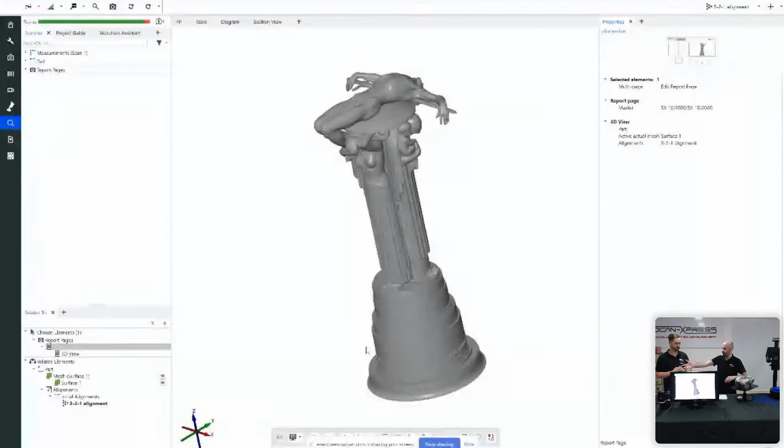But yeah, this is a great example of this handheld scanning system scanning a really large object and using photogrammetry. Yes. So thanks, Ben. So this is a job that we did in Sydney. I flew up with the carry-on T-Scan Hawk, and we measured this sacrifice sculpture. This is actually in the Anzac Memorial in Sydney, and it's about 3 meters tall. So if I come here to the side view, you can see it's just about 3 meters tall.

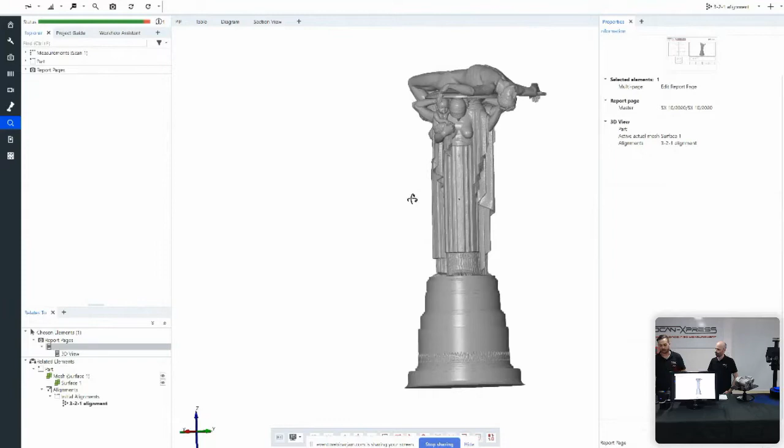So we've got a sculpture here which is meant to be representative of the loss of life during war. Not just the soldier on top, but obviously all the women in his life that supported him and are grieving for his loss as well. But what we've got is, within the GOM suite here, the project where we did all the scanning, and we've got full traceability. If I open up measurements, I've got 2 measurements: photogrammetry and the actual scan data set.

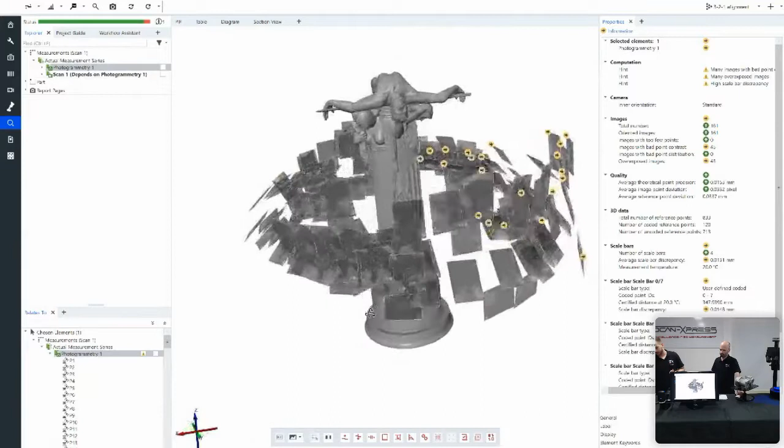Okay, so if I come back to my image mapping, I can see some of the images which I captured beforehand using the photogrammetry system. If I take this photo right here, we can see some of these sparkly points because we've been using retroreflective markers, which we've applied to the surface beforehand. And we've already put them on the part that we're going to be measuring today.

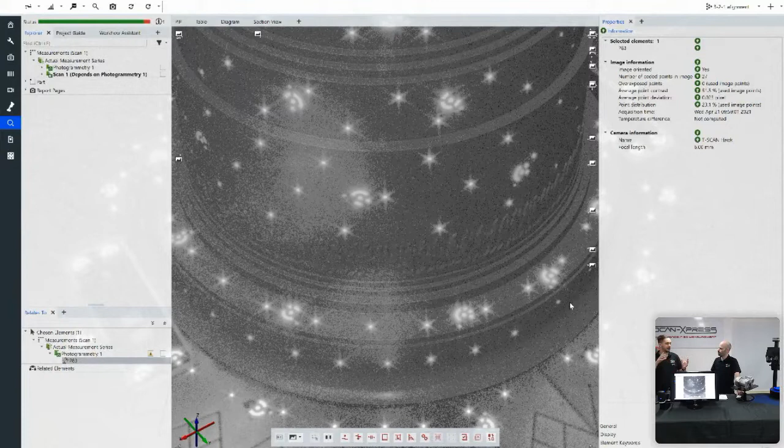We've got them all laid out here, and that's what the scanner uses to identify itself relative to the object. I've also got some coded markers here, and they allow the software to transform all of the photogrammetry images together. So I put all the reference points and coded reference points over my object, and I also keep these scale bars. These scale bars come with the system, and they allow me to verify how well I performed my volumetric photogrammetric study.

Once I've done that, I've got this sea of photogrammetry points. If I turn the scan data up, it's all of these reference points that you can see here, all the way around the object. The photogrammetry captures all of them, and it gives me feedback as to how well I've done. If I come into the photogrammetry module and turn off image mapping, we can see deviations of about 0.01 millimeters and 0.015. So we've done a very good job with this photogrammetry.

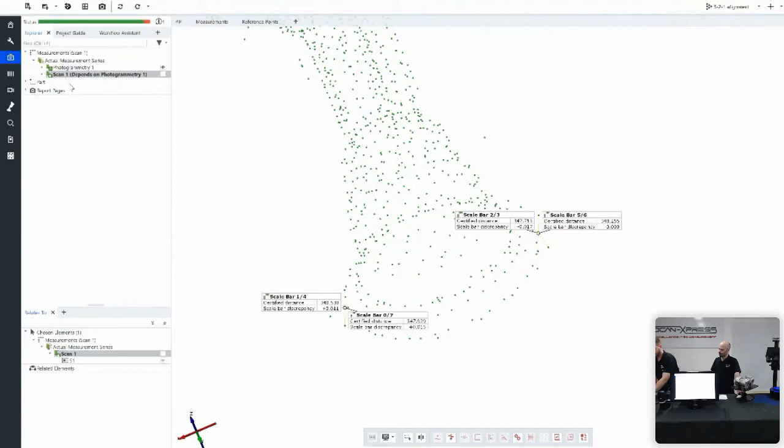Once we've done the photogrammetry, we're able to do the cloud scanning, which is moving along with the scanner, capturing all the surface data. And you can see the end result right there, a really high resolution, dense mesh fully describing the object.

While I've got your attention, I'll just come to our website so you can see some of the photos that we took during the measurement. No, it doesn't want to do that. That's fine, we won't worry about that right now. So that's that little project.

What I will do now is jump into a live project showing how 3D scanning works with the T-Scan Hawk. Sure, but we're not going to do photogrammetry in this one. No, because as I mentioned at the start, it's got about a 500 field of view, so this object falls completely within the field of view at any one time. There's no need to worry about transformation deviations, because it's all captured at the same time.

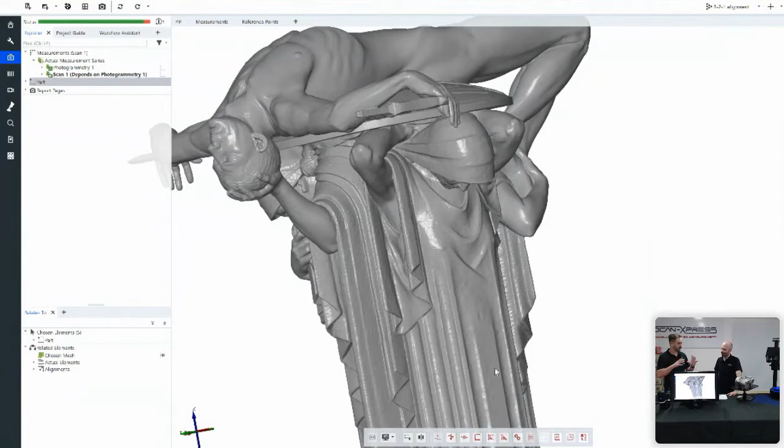Yeah, sure. So I'll open up another project now. So this is a blank project. So the first thing I want to do before I start scanning this is sort of like the photogrammetry, but not necessarily similar, because I don't have the scale bars in it, but I want to capture all of my reference points relative to it first. So Ben's going to click on the capture reference points for me.

I'm going to pick up my scanner, and I'm going to start scanning. And what you're going to see is within the software, you can see sort of a wireframe, and that's sort of the measurement volume that the scanner is looking at any one time, and you can see some measurement dots in there. Those are the reference points that I've already put on there. And as I rotate around, we're going to add new ones in. So it's seeing new reference points and capturing them.

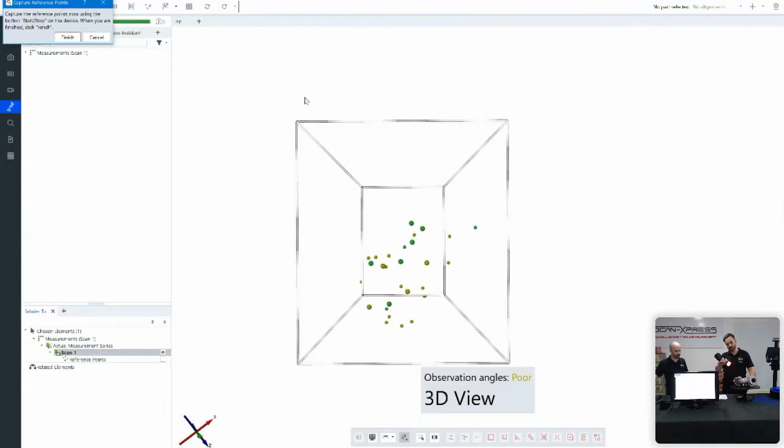And what I want to do is move all the way around until I've captured all of the ones on this side. You'll see some of them turn green, and that's saying that we've captured them at good observation angles. So I'll just go around once more, make sure I've captured all of them on this side. Continue scanning on this side.

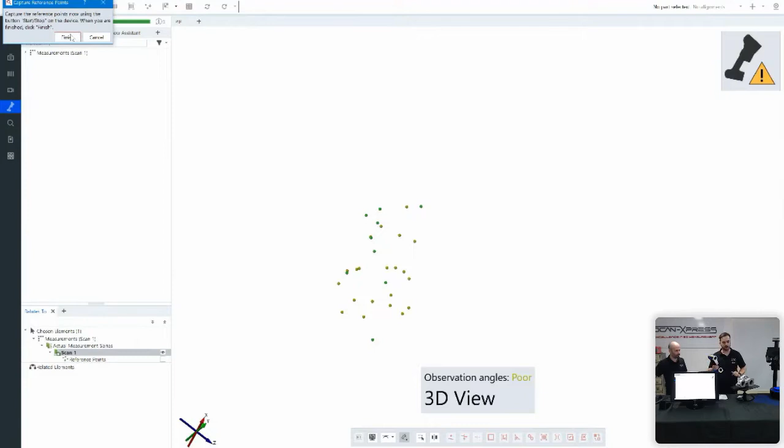So one of the other things I wanted to mention is the fact that I'm just using a manual rotation table here, so it helps me to move the part around without actually interacting with it. So when I start scanning here, you should see that they're red, new reference points that I've taken a measurement of, and they're red because it doesn't know where they are relative to the reference points I've already measured. But when I come down to the side and start continuing further around, you can see, there we go, they've transformed together. So I just keep going around.

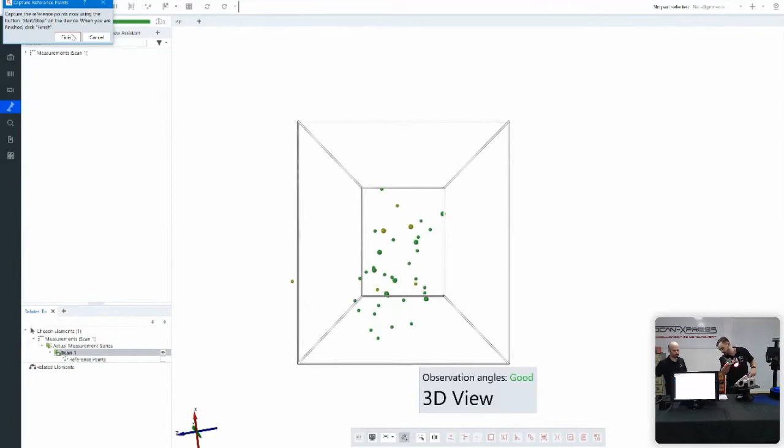One of the other nice features about the scanner is it tells me when I'm too far away or too close. So at the moment you can see in the scanner I've got these nice green lights. Actually, maybe you can't because it's a little small view. Take my word for it, it's got some green lights there, and if I come too close, it starts beeping at me and the lights are telling me to move away. Similarly, if I'm too far away, the lights are telling me I'm too far away and to come closer.

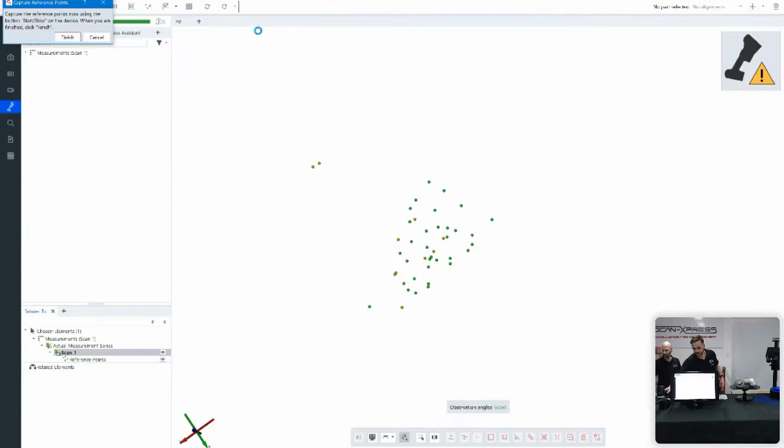But I've gone all the way around now, I've captured all my reference points and I'm happy. So I'll put this down. Ben's going to click finish scanning for me. So I'm ready to start scanning now, but one thing I do want to do before I actually start scanning is tell the system where my rotation table is. Because if I was to start scanning this right now, I'm not going to scan just the part, but I'm also going to scan this table and maybe even the table that the rotation table is sitting on. So that's not something that I want. I only want to capture the data on the part.

So what I do is I grab these. These are just a couple of business cards that have some additional reference points on there. So I put them into the field of view. And the software is going to look for some new reference points now. And when it sees these new reference points, it's going to fit a plane through them. And that plane is going to be my background plane. So any data from that plane down is going to be ignored by the scanning system and not brought into the software. But now that I've got my background plane defined, I've got all my reference points defined, I can start scanning.

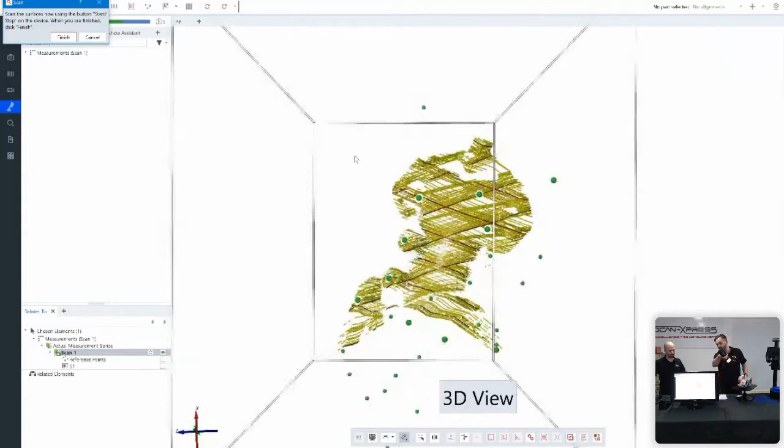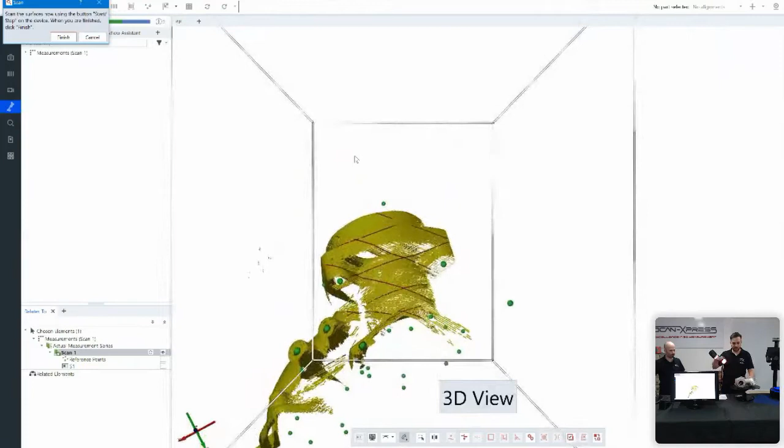Okay, so when I press start now, probably not going to be able to see it in the camera feed, but what you can see on the software is that there's some red laser lines across the part, and they're seven red laser crosses. And the two cameras look at those laser lines to figure out the 3D geometry. And essentially all I have to do now is just rotate around until I've captured all the surface data. You can see it being built up there.

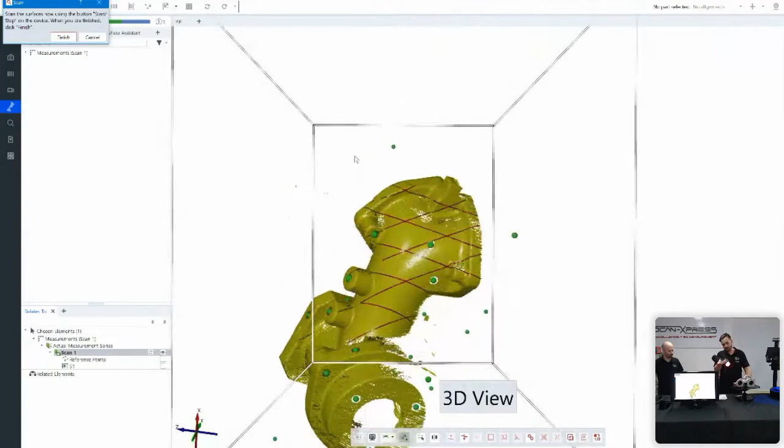So we're scanning at 0.5 millimeters of resolution at the moment. So what that means is that across the surface, every 0.5 millimeters, we're collecting a data point, which is plenty for a part like this. And just keep going. You can obviously see in the software where we've missed data, where we need to capture a little bit more data.

But we're looking pretty good. So I think we're probably just about ready to say that we're happy with the data we've captured on this side. Yeah, looks good to me, man. Yeah, looks great. Okay, so I'm saying that I'm finished on that side, and what I want to do now is flip over and scan the other side. So I'm literally going to flip the part over.

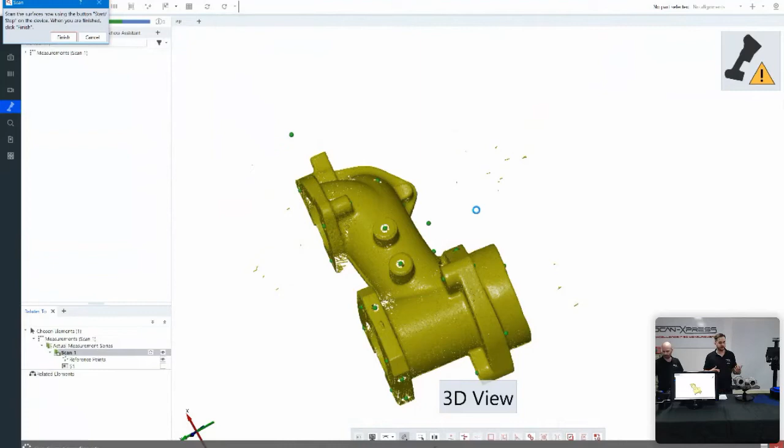Okay. And what we need to do now is we need to redefine where that background plane is, because when I was scanning before, I said the background plane was there and it would be deleting anything that way. So I need to redefine where it is using the same cards. We just need to wait for the software to be ready. Lovely. Thank you, Ben. All right, all good.

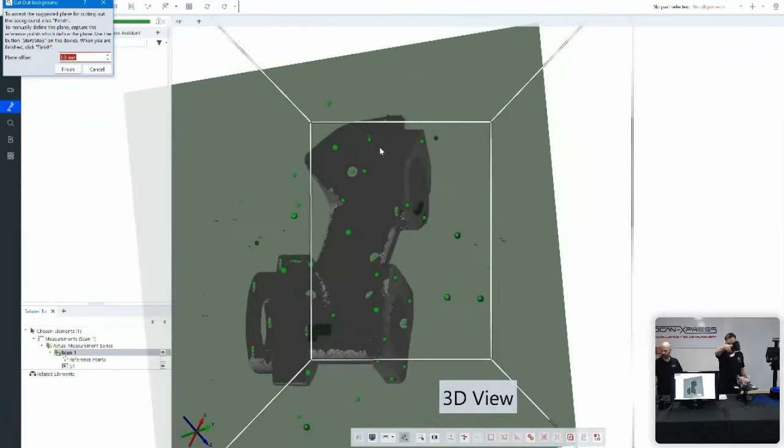So again, it's going to look for some new reference points. 1, 2. Oh, do that again. Yep. Is it happy? It's got it. Yep, it's got it. Great. All right, so I can remove these again from the measurement volume. And now, because I have pre-measured the reference points from both the top side and the bottom side, when I start taking this same data set, it's going to stitch it into the previous data set that I've collected. So you can see here when it starts.

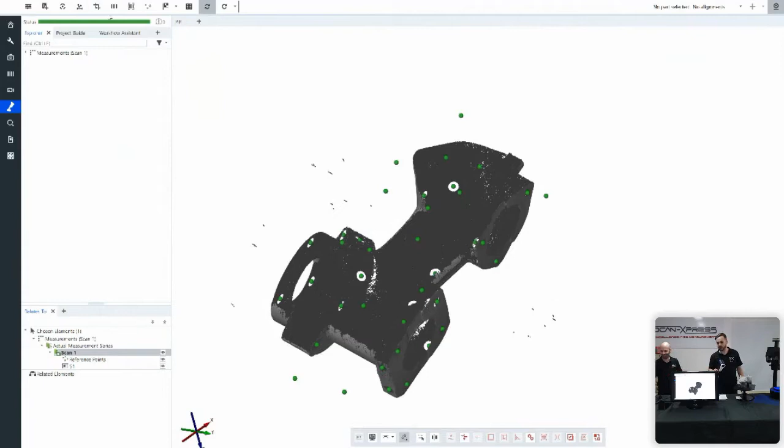You want me to? Please click scan. I'll press the button for you, mate. Don't worry. Thank you. We can do it without me.

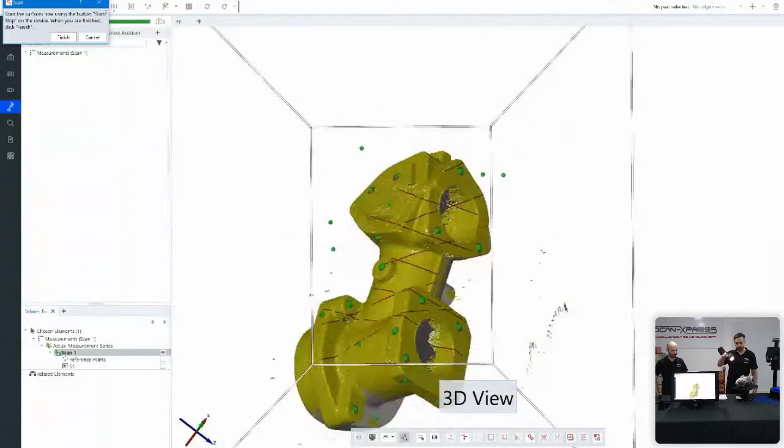Yeah, exactly. So there we go. So now we can see the data being collected in that same coordinate system as what we previously collected. And again, same as last time, we're just going to keep going until we've captured all the data. Pretty easy. Let's go around a little bit more. Okay, do need to go around one more quick time, but I think it's looking pretty good. Yeah, I think it looks pretty good down there. Excellent. Okay. So I click the power button in the back. I can put this down.

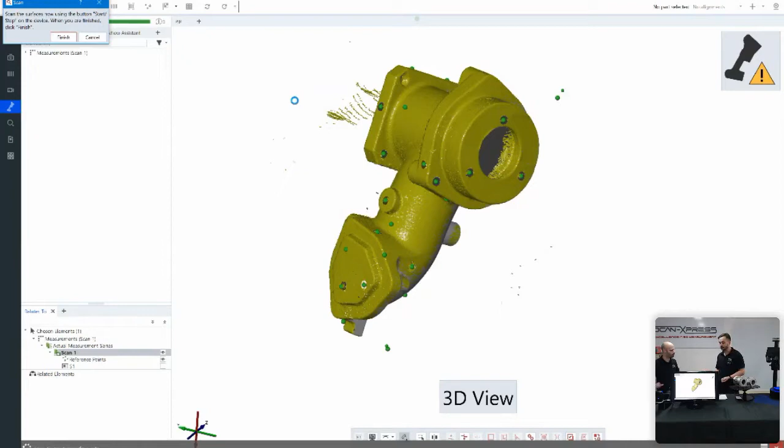So as we sort of mentioned at the start, the reason we were scanning this is to showcase it as a reverse engineering example. So what we've done is we've collected a dense point cloud, thousands and thousands of points over the surface. We've done it from both sides. So we've finished the scanning process, but the next step is what we call polygonize it, which is tell the software to process the thousands and thousands of points into a single mesh surface file. And then once we've got that, we can do whatever we want with it, whether it's inspection or reverse engineering. In this situation, it is reverse engineering. So let's throw it to Ben now, and he's going to show us some reverse engineering of it.

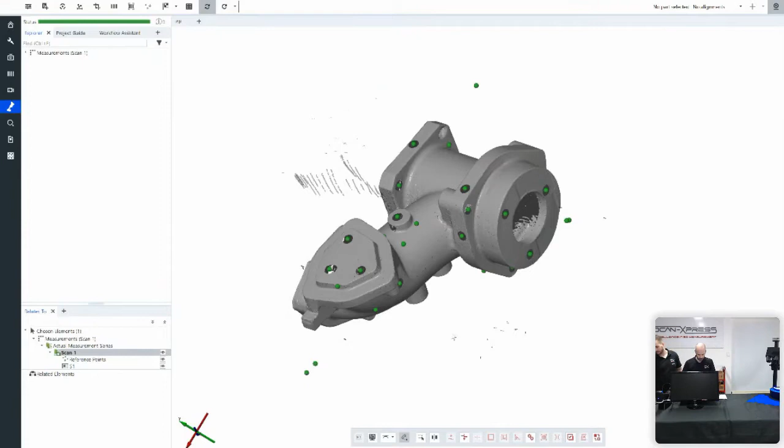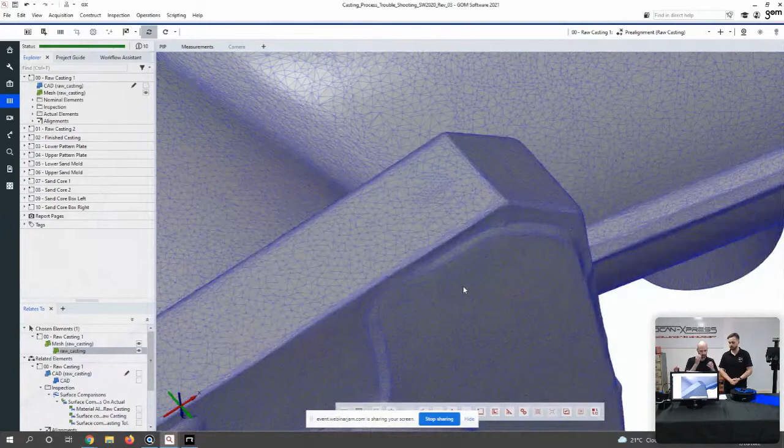So what we can do then is, as Josh said, we can go ahead and start looking at that reverse engineering process. So we can export the data from the GOM software straight into the ZEISS reverse engineering ZRE package. So all I do is just right click on the mesh there, top option here, export to ZRE. We can also export to DesignX, which is a third-party software, but we're looking at ZRE today, so we can do that. And then that's going to open in here, which is our ZEISS reverse engineering package. So this is where we can start building up our math model around our scan data.

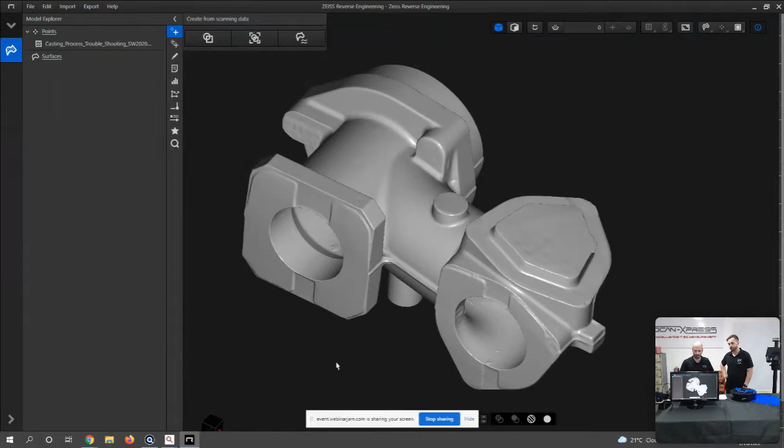Because what we're going to do is, let's say we want to remanufacture this part. We don't want to do that straight from the scan data, because what that's going to do is just carry out any errors from that scan into the actual part. You know, if we look at this plane right at the top here, you can see that it's not planar, really.

There's lots of pitting, there's lots of holes in it. It's not that true geometry that we want to then start remanufacturing from. So what we can do is actually start creating those math surfaces from this data. So in the ZEISS reverse engineering package, we can best fit these features straight to our scan data.

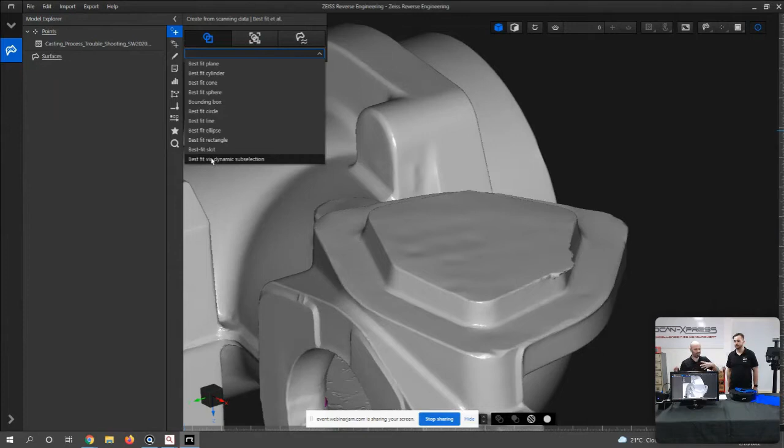I can do it by dynamic subselection, which can do quite a lot of the hard work for me. All I need to do is just click on the surface I want and select what kind of feature. So in this case, it's a plane here. What I can do is just increase and decrease the selection. So what I'm looking at is that orange selection. Make sure it's a nice even coverage across that whole feature that I want.

Now what we can do is actually calculate those current parameters. So what it's doing is fitting that geometry to the selected points and telling me what this reference axis is. Now I can accept that, but let's say we want to reverse engineer to design intent, as in how this part was supposed to be manufactured. What we can do is come in here and actually edit these features.

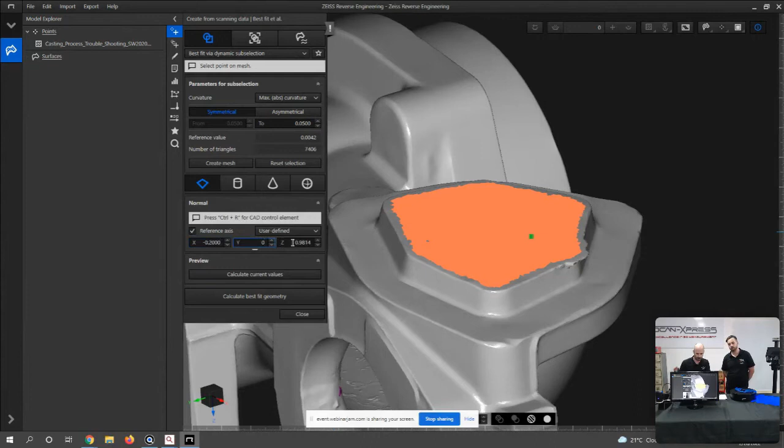So what this is meant to be is maybe -0.2, the Y is probably 0, and the Z is probably 1. And what we can do is then best fit our geometry, and it's going to calculate that plane to the reference geometry. So you can see a nice plane there. That's exactly where we want it to be. So we can create that one, which is done.

And now what we want to do is maybe select this one right here. So this is a cylinder, so let me select the cylinder. I'm going to again select that surface. We can see that orange sub-selection right there. We can adjust that by increasing it. So what I want is a nice even selection all around that cylinder, using as much of this good quality data as possible. Again, we can calculate its current values and have a look down here.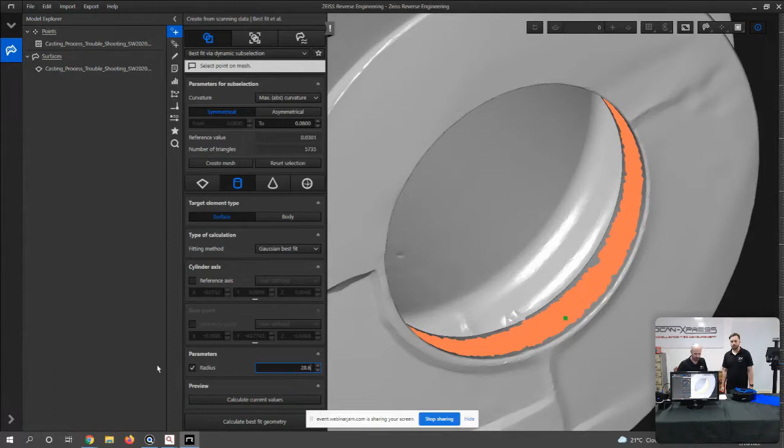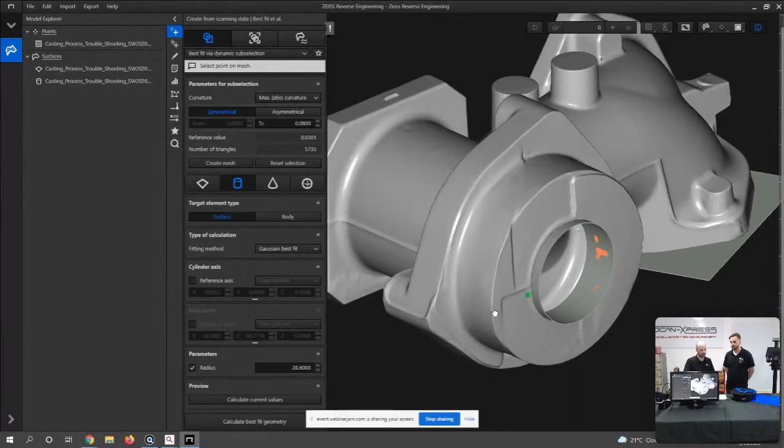That radius, 28.6, and then we can calculate that best fit geometry. And that's going to fit that cylinder exactly where we want it to be, right in that feature. Now, all this is going to be is just fitting all of my surface features to this geometry, building up the model, and then eventually combining them all together to create our solid, cutting them all through. It takes a bit of time, but that's the general process, selecting them and then editing these features.

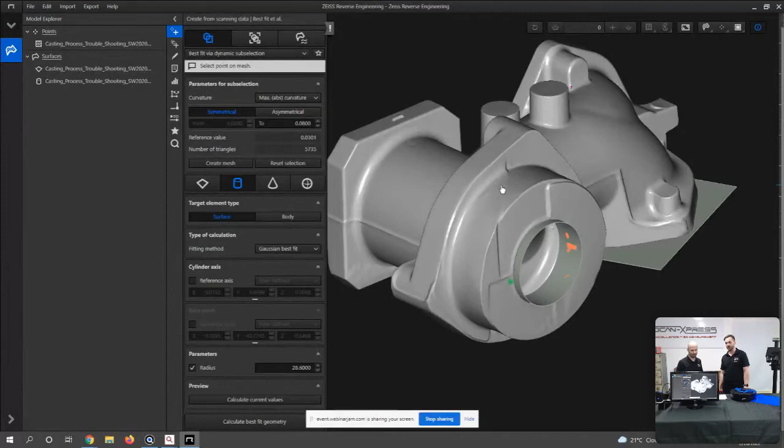But ZRE is a pretty fantastic product. This is only showing a tiny amount of what's really possible with it. One of these great features is called Tool Correct. Talk to me about Tool Correct, Josh. Tool Correct is a cool feature within ZEISS reverse engineering. It does literally what its name is: it corrects tools. So we've got a nice video which we can play here.

But what it is, is a way for us to measure a component that comes out of a tool, whether it's a casting tool or a plastic injection molding tool, and then get information about how that part deviates from the ideal part. But rather than telling somebody else what the problem is, it's actually going to correct our tool. So it's going to modify the CAD model of the tool so that the part that comes out of that tool is closer to the design intent.

Yeah, exactly. So it's just reducing those design iterations that you might go through, where you change it, test it, measure it, change it again, test it. Yeah. What we can do is reduce those steps down. So we just take the part, and it's going to actually adapt the CAD model to the captured scan data of that part. Let's show you this video. It's a really cool feature. So we'll play this right now.

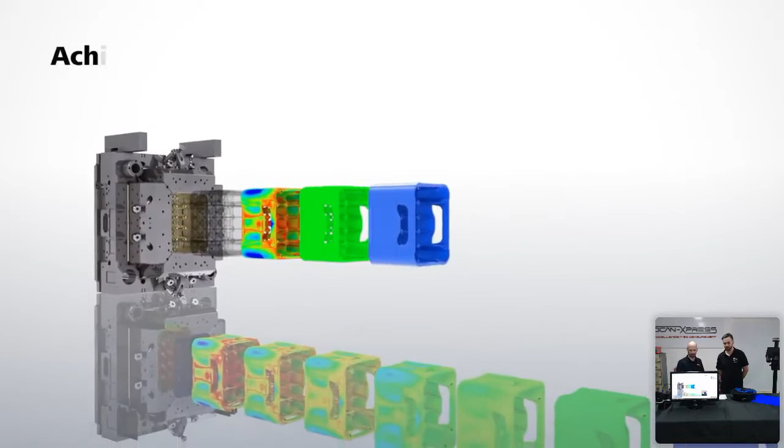Yeah, excellent. Really nice video showing that feature. So yeah, we just had a couple of questions while that video was playing. Maybe we'll answer these straight away. So, Josh, the software that we're using. Sure. So Frank's asked what software we're using. So the two software that we have shown the scanning in is called GOM Suite, GOM Inspect specifically, and then ZEISS Reverse Engineering, where we've done the reverse engineering.

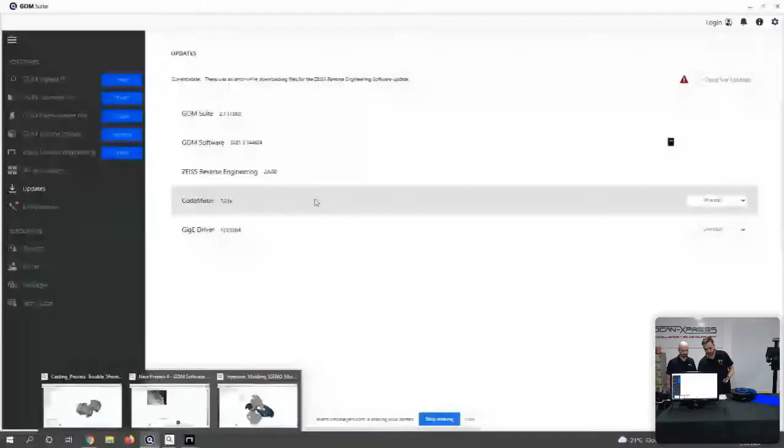But maybe one thing that I can just show really quickly before we proceed, just to make it crystal clear, if I turn screen share on here, what we can see here is the GOM Suite. So whenever you want to access any of the GOM softwares, you open up this GOM Suite, which is this black and blue icon here, and this gives us access to all of the GOM softwares. So we've got GOM Inspect, and that's where we've done the scanning so far today. It's also where we're going to continue doing some scanning and some inspection. And then all the way down the bottom is the new ZEISS Reverse Engineering software. So that's where Ben showed the reverse engineering of the casted part and that scan data that we had.

Okay, another question? Yes, another question from Amanda. Would this work on a small injection molded part, the size of a pen lid? So absolutely, those features within the ZEISS Reverse Engineering software would work on parts of that size. What you might want to consider though is the scanning system that you use. This laser scanning system that we've just shown is great for medium to large components, but it probably won't get quite the resolution for a part the size of a pen lid. So that is where we might want to use something like the ATOS Q, which leads us quite nicely into this, because we'll show you high resolution scanning that works on small components like that.

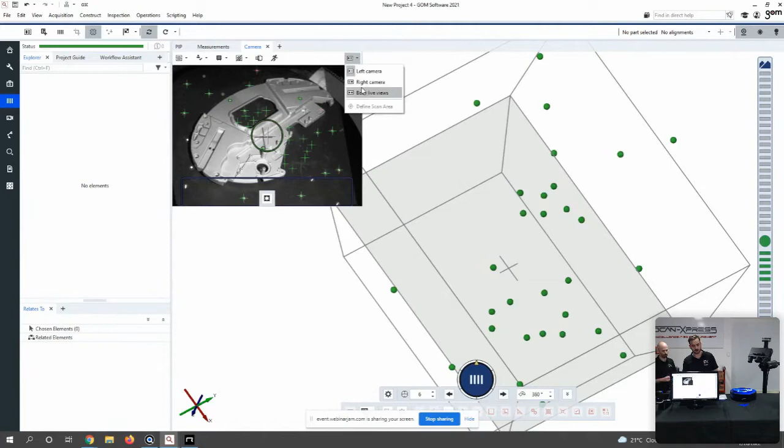Yeah, great. So let's get started. What we're going to do is dive back into that GOM Inspect software, and this time it's going to be configured to start scanning with our ATOS Q right here. Start sharing that, and then Joshy can carry on. Great. So same as we did with the ZEISS T-Scan Hawk, with the ATOS Q we still scan into the same software, GOM Inspect. And what we can see here in this top left corner is a camera feed, so I can switch this from just the left camera to both live views, so you can see what the left camera and the right camera of the system are seeing, and we've got our part in the middle of the software there.

So one of the really nice things they've introduced in the 2021 version of the software is this workflow assistant. The workflow assistant is really great for somebody that may not be too experienced with the software or may not have been formally trained with it. With the workflow assistant, they can follow these prompts and get some really good scan data without too much effort. So the first option asks whether we want to scan a single part or multiple parts simultaneously. There is an option for multi-part scanning where we can divide the measurement volume of whatever measuring system we're dealing with into pieces of a pie, into segments. But today we're just dealing with one part, so I'm going to say scan a single part.

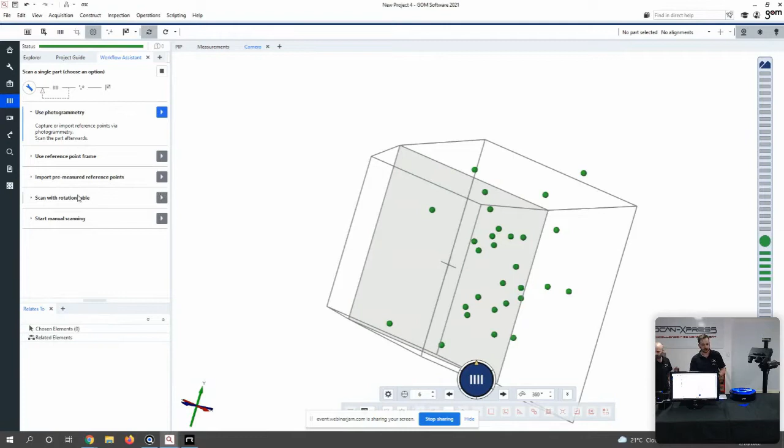Then the software asks me some questions about the reference points. Are we using photogrammetry, if I've done a photogrammetric study for a particularly large part, for example, or a reference point frame, or do we want to import some pre-measured reference points, or scan with the rotation table? And we want to scan with the rotation table today. What we've got here is a GOM ROT 350, which is an automatic rotation table, and is recommended to come with the system because it saves a lot of time. So I'm going to scan with the rotation table. I'm going to bring up my camera again, switch back to just the left camera, and say start scanning with the rotation table. It's going to ask me for the temperature.

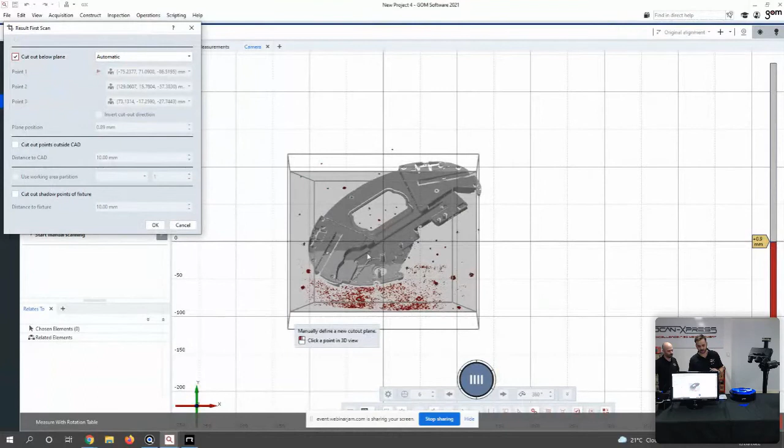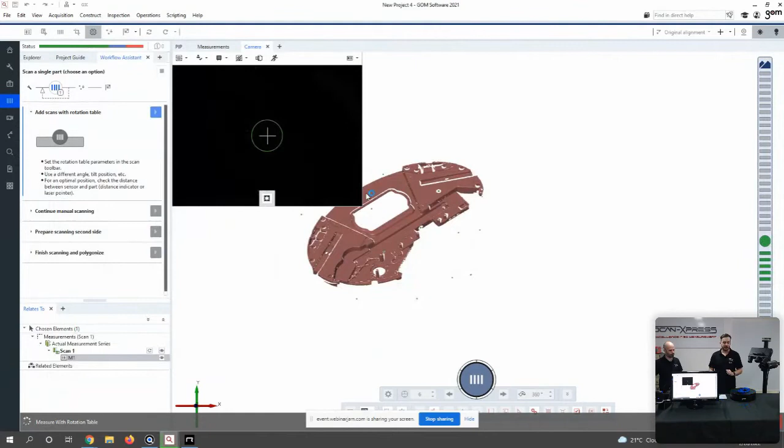And what you'll see in a moment is the left and the right camera project a series of lines horizontally and vertically across the part. We've taken that first measurement there now, and what it's asking for me is to define our cutout plane. So similar to how we did it with the T-Scan Hawk, where we manually defined it, this time it's automatically defined it for us. So it's just scanned the bottom of the table there and figured out where the background plane is, and it's asking us if we want to cut that out, and we say, yes, please, we want to cut that out.

So now we continue, the rotation table rotates. Again, the projector projects its lines across the part. The two cameras look at those lines to build up very high resolution detail mesh, and you can see the speed at which it's doing. What kind of resolution are we working to with this system, Josh? At the moment, with the ATOS Q 12 megapixel system over a 270 volume, it's 44 microns. 44 microns, that's about 10 times the resolution to the laser system. That's right, yeah. So it's very, very high resolution, very, very accurate data.

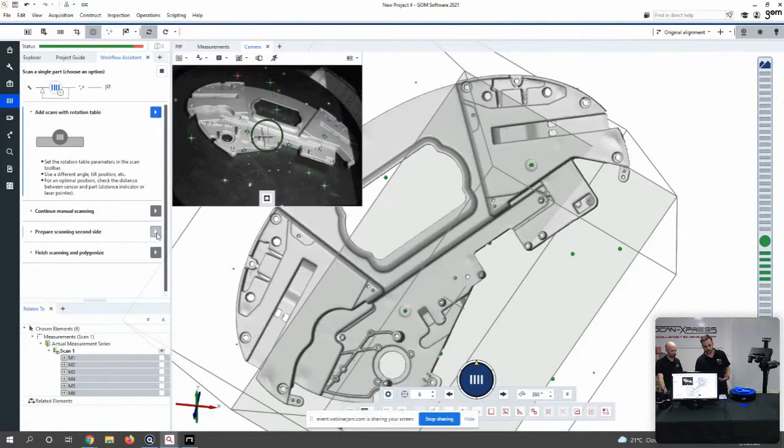So we can see, if we come across here, we can have a look at some of that very high resolution data. Now, actually, what we're looking at here is just a preliminary version, just a way we can get an idea of if we've captured all of our data or not, and we're happy with this. So what we need to do now is flip the part over and continue scanning on the other side. So I'm going to say prepare scanning second side here in the workflow assistant. It's ready for me. Now I flip the part over on the rotation table. And again, I can say scan with the rotation table.

Okay, so similar to last time, the system projects the pattern across the part. It's going to automatically detect and cut out the plane for me, which is right there, and I say, yes, please, get rid of that. And again, we continue rotating and scanning and rotating and scanning. So yeah, this is a complex plastic injection molded part. So because of features, it's a bit more well suited to a higher resolution, more accurate system like the ATOS Q rather than the T-Scan Hawk.

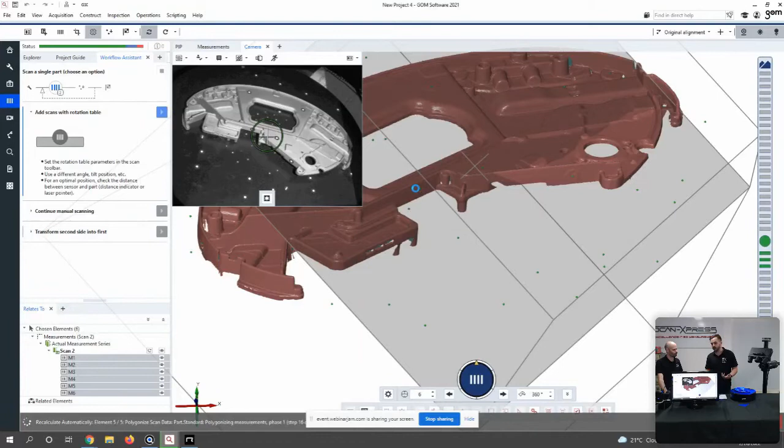The other benefit of having a more accurate, more repeatable measuring system is the fact that we've got greater confidence in the measurement data, and that means we're able to make good decisions when we're doing our inspection. Yeah, exactly. That's why this might be used for an inspection type project, whereas this system right here might be used for reverse engineering. Yeah, great. So what we've done so far with the ATOS Q is we've scanned one side, the rotation table went around, we captured that data, we flipped it over and measured all the way around again. What we've got to do now is put those two halves together.

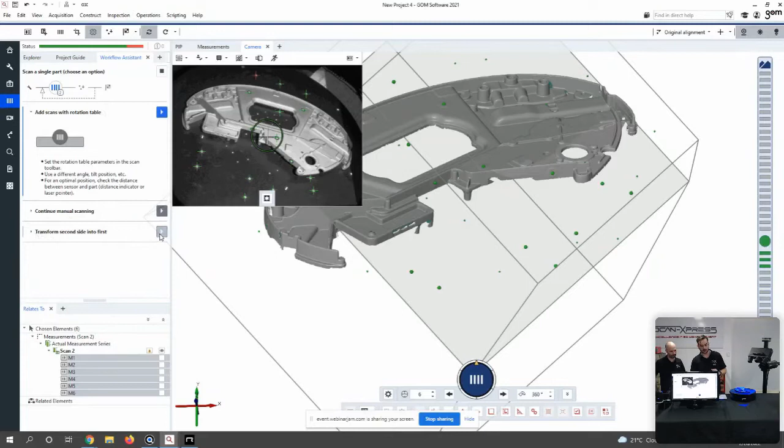So we can say, again, within the workflow assistant, transform second side into first side, and the software is actually going to do this for me automatically. So we can see here we've got one side over there in burgundy and the other side over here in grey. And we've got some quality feedback as to how well we've actually done that transformation between the two halves. And the software is telling me it's a high quality transformation. So we're happy with that. Congratulations. Thank you very much.

So once we've got this data, similar to how we did it with the Hawk, we've collected our dense point cloud. We want to now polygonize it into a single mesh file, and then we can start doing our inspection workflow with it. So Ben, you're going to jump in to another project where we've already completed the scanning. Yeah, exactly. So all that's going to be doing is just taking over from exactly that step where we've just polygonized all of this data. So what you can see here is the output from this GOM file, which is this high resolution point cloud of data.

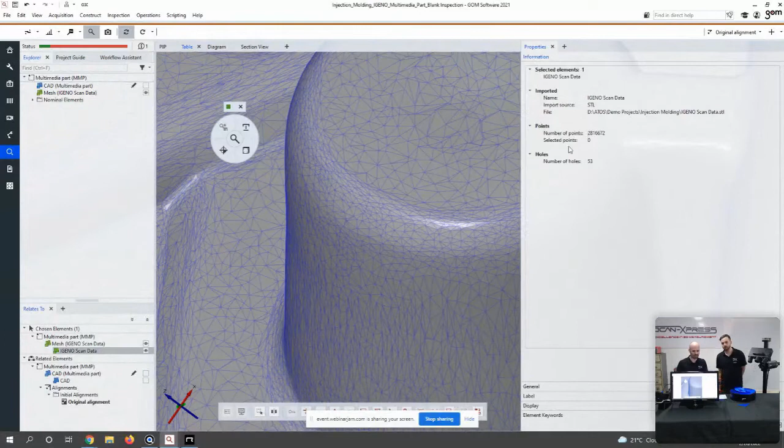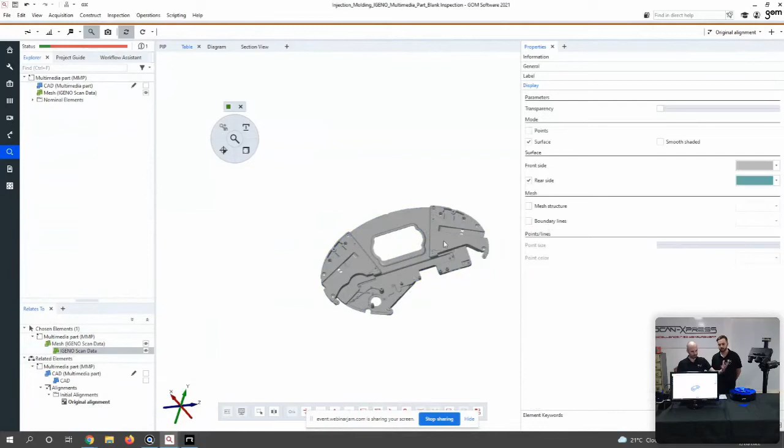Now you can see here up in the information, we've got just under 3 million data points captured on this injection molded part. So it's very high resolution, really good quality data. This is the standard output of data from this ATOS Q, and it's a fantastic measuring tool for getting this really good quality, high resolution scan data. But now what we want to do is actually inspect it. Yeah, we've got our part, we've scanned it, we've got our manufacturer drawing, we want to see what kind of results we get.

So what we need to do is start doing some alignments. So what we can do is do a pre-alignment to start with. Now what this is going to do is just a global best fit, just slam these two parts together so we can start our inspection process. It is just a best fit, but we can use this to actually start doing some of our inspection.

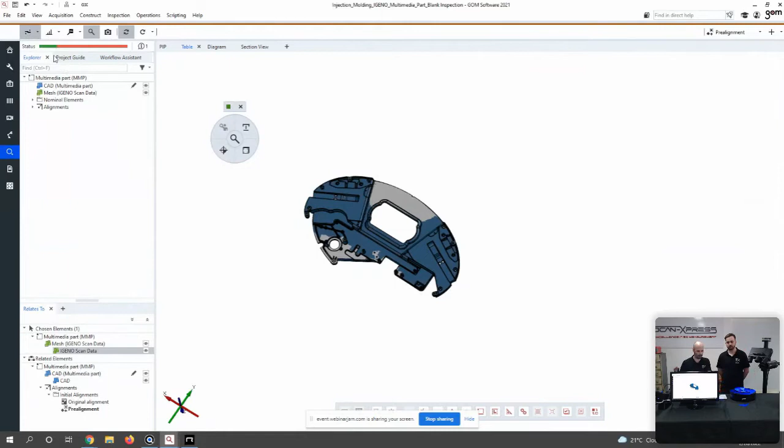So what we've got along the top bar now is some of our quick access shortcuts, so I can do my surface comparison. It's usually a good way to start the inspection, and what it's going to show is the closest point on the scan data to the closest point on the CAD model, and show that up as a color map, so we can get some initial inspection on how good our part is.

There's input tolerance, maybe 0.2 mil, and then maybe just change our color map right here to, let's say, 0.5 mil. And then we can start having a look and seeing where our part sits. So any data that's blue means that scan data is below the CAD model, and anything that's yellow or red means the scan data is above the CAD model. We can see that overlay here if I just bring up the CAD model and how that relates to our scan data, which is that color map.

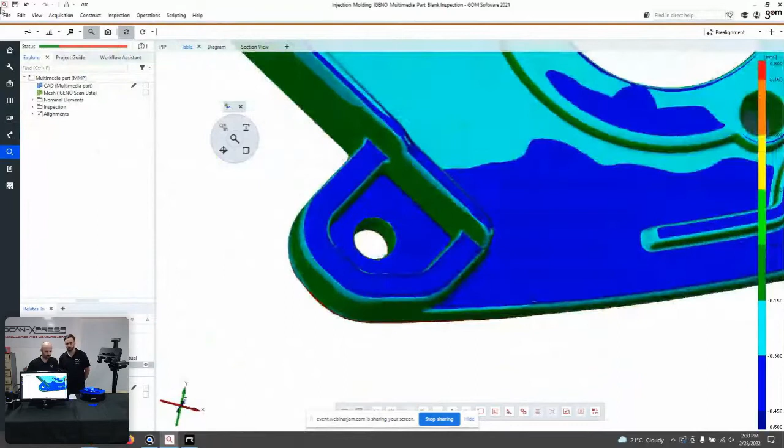Now what we can do is apply some deviation labels right here, and by just holding down my control key, I can create some of these deviation points straight on that color map to know exactly what the deviation is in any of those localized areas.

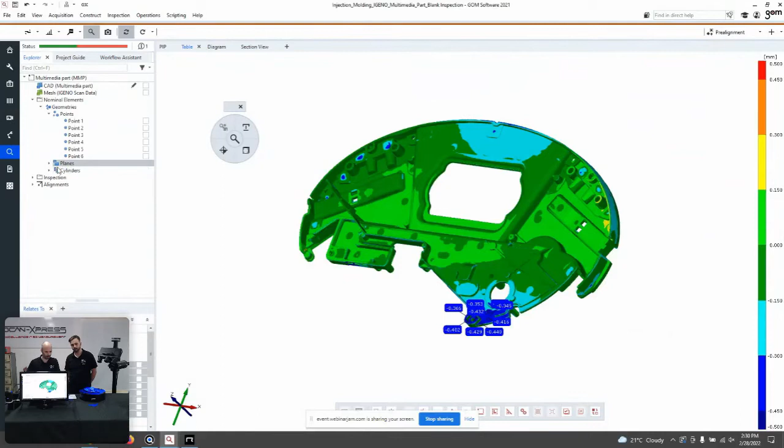Now, what we can then do is, we want to inspect back to a manufacturer drawing, right? So we can't just rely on a best fit. We need to rely on an actual solid alignment. So I've already created a few features right here on my CAD model, which is some planes and some cylinders, which relate to these datum points. So let me just apply my fitting element. Essentially what I'm doing is saying fit all of these elements to the scan data in the best way you possibly can, which is done.

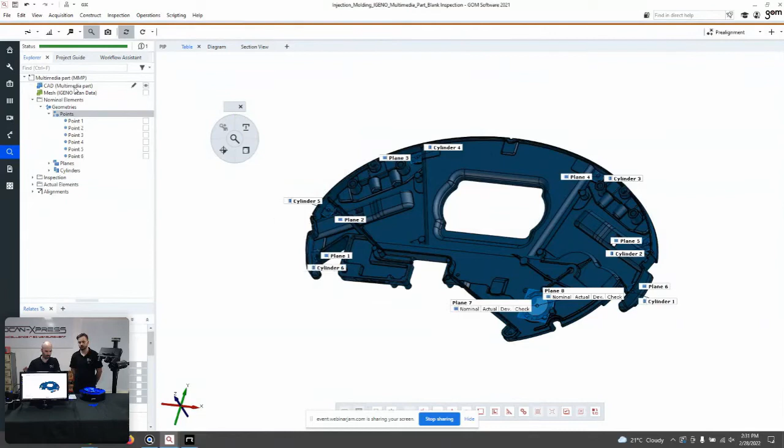And then I've got my reference point right here, which is my reference construction. And then what we end up with is these 6 points, which are my datum points defined by my drawing. So what I can do is do an RPS alignment, select those 6 datum points, and that's going to align to those points. Now that's a fixed alignment rather than that best fit.

Now what that does is it's going to add in a new alignment to my tree, which is just on the left-hand side. So you can see here, I've got my initial alignment, which is that best fit, and underneath that, I've now got my RPS alignment. We can have as many of these alignments as we like, so we can do multiple alignments to every part. So what that means is maybe on a casted part, we can inspect our casted datums, as well as doing a best fit or a localized best fit on the surface, and really get a good understanding of what's happening with our part.

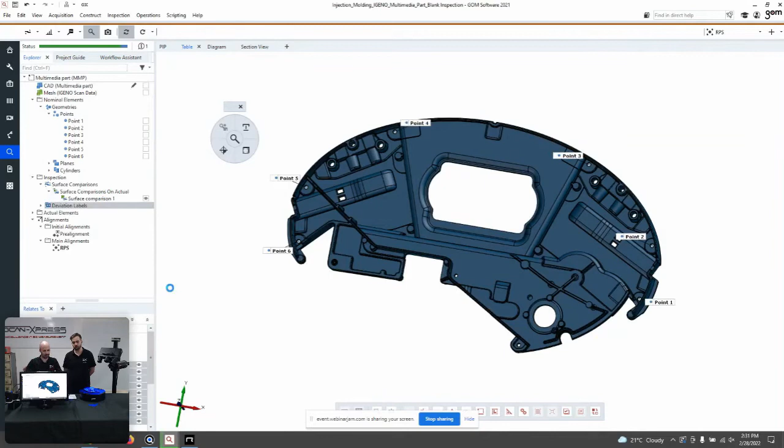Now this is going to update all of my inspection live. So if I just bring up my surface comparison, it's just going to update to that new alignment. And what we'll be able to do is switch between these alignments and see how that alignment is going to change that color map. So see what's happening there. That's how we can get a really good understanding of exactly what's going on with our part.

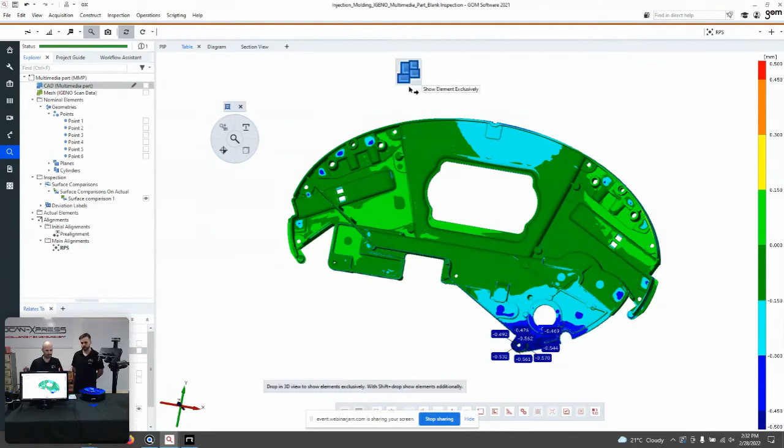So once we've done this and we've got our color maps and we've kind of got a good understanding of what's going on, then we can start doing some actual feature-based inspection. So this is where we can create some features and do some inspection as you might see on a drawing. So let's just take some features here. So we've got this conical shape right here. I'm just going to create a fitting cone to that by just, again, control clicking on the surface. Fitting element to snap that to my actual scan data, and then we can do our inspection.

So we've got this little circular widget right here. This is called the iInspect, and it controls all of my dimensional checks and all of my GD&T. Everything's controlled here, and it actually updates depending on what got selected. So I've got a cone selected here. It's going to give me everything that's relevant for a cone. So in the checks, it's just an angle because I can't do any diameter or radius inspection on the cone.

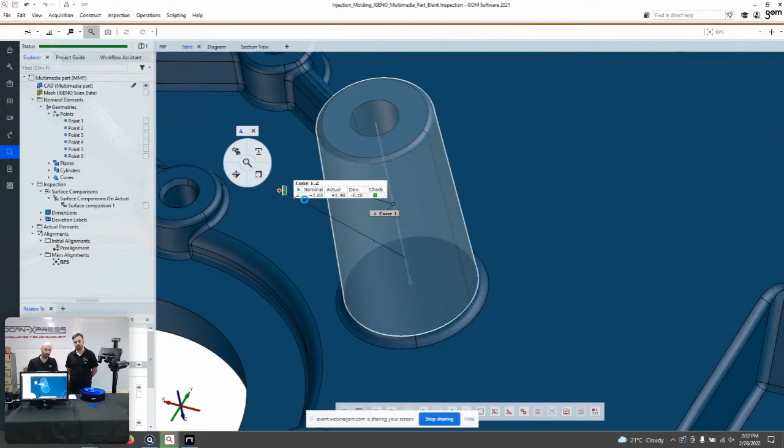What we can do is apply a tolerance, and that's going to give me my pass-fail check, and I can go into my tabulated report and create all of my intuitive go, no-go reports from there. We can also do all of our GD&T. So let's just say we want to do a flatness check.

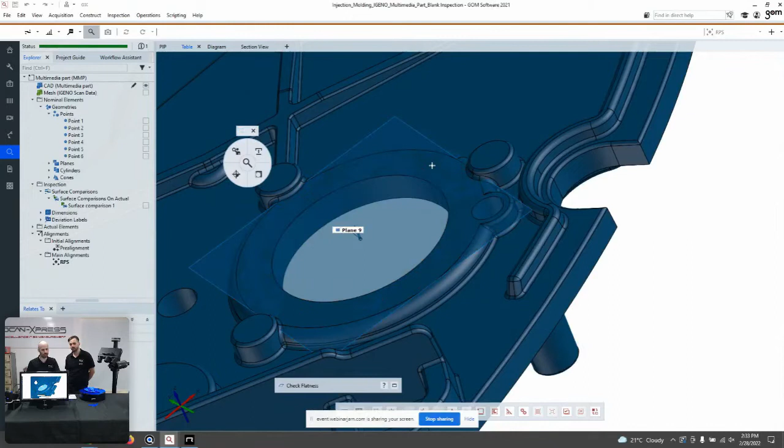What we can do is come over to our CAD model right here, select the flatness check, and then click on the surface. And that's going to do everything for me. It's going to create on the nominal, create on the actual. All I need to do is input a tolerance. So that's all done, and we've got our GD&T flatness check.

But the great thing about GOM Inspect is you don't have to stop the inspection here. Just because we've got a green tick, we've got a pass, doesn't mean that the inspection needs to stop. We can go into much more detail. On this plane, we've got probably 10,000 individual points, and we can inspect every single one of them.

So what we can do is show the color deviation representation, bring back up our scan data, and then maybe reduce our tolerance legend down just slightly. So let's go for 0.1 of a mil. And then what we can see here is actually that surface comparison again, but this time it's just related to this flatness check. So what we can see here is, it's a plastic injection molded part.

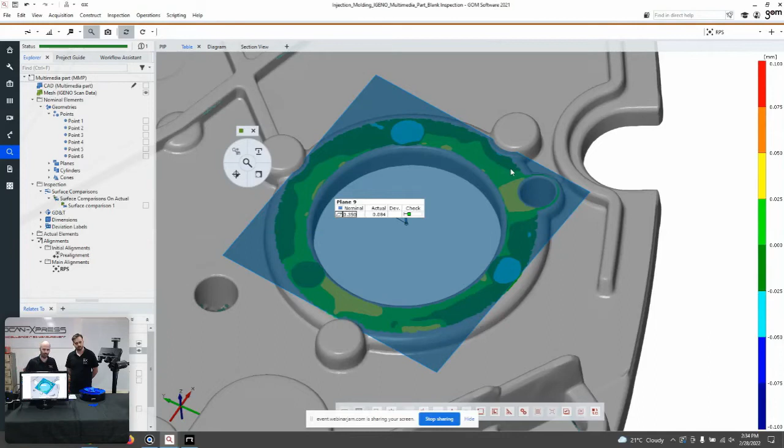These are the ejector pins, and we can see the 3 ejector pins right there and how they've impacted that surface. Now, just because it's passed our flatness check doesn't mean that it's not still having an effect on that surface. Now, by using these tools and maybe going into some more detailed analysis using some SPC or tracking some data over time, we can see if this tool is wearing and if it's going to fail at some point, and have that predicted failure built into the software, so we can do this ongoing analysis of our parts.

So the level of detail that we can go to with the inspection reports is huge. So we can have these go, no go, pass, the parts passed, it's fine, it goes on down the line, but then we can have these additional reports going on in the background where we get all this extra additional information. Pretty good, right? It's amazing.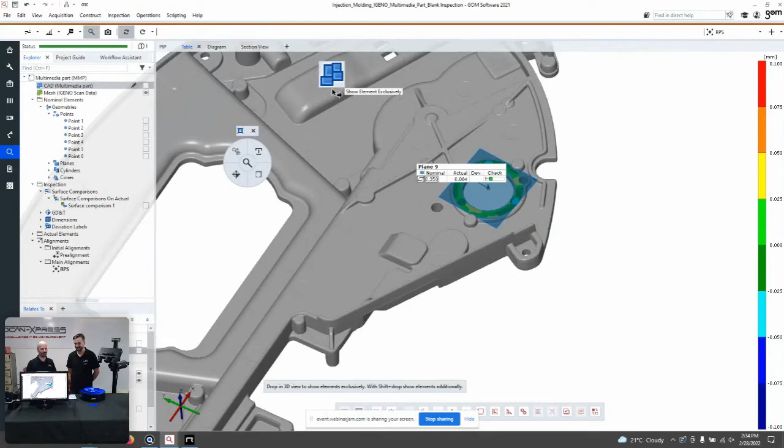So another feature that I want to talk about, and this is where I get probably excited. I've been excited before. So this is a new feature that's coming out to GOM specifically for plastic injection molded parts. And this is called dewarp. So what this is, when you get plastic injection molded parts, as they come out of the tool, there's going to be inherently some warp, some twisting, and that might be related to the cooling, it might be related to how the material has been injected into the tool, and that's going to have an effect.

Now, what we usually do to inspect those is we physically clamp them. So we'll have a fixture that physically clamps them into their assembled position, and then we can inspect them in their assembled position. The problem with that is that they are expensive to manufacture, they take time to manufacture, and if we're working on a development part, maybe we don't want to invest in having those fixtures just for inspection.

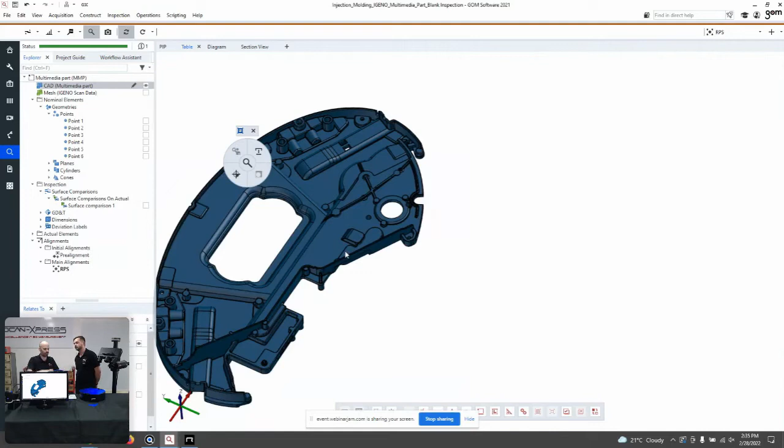What we can do within the software is this thing called dewarp. And what that's going to do is adjust our scan data to allow for that warpage. So we can actually constrain the live scan data within the software. I've got a short video. I'll show you how it works, and we can talk a bit more about those features, and I can get even more excited. So let me show you this video. I'll dive back into right here, video right here, and dewarp.

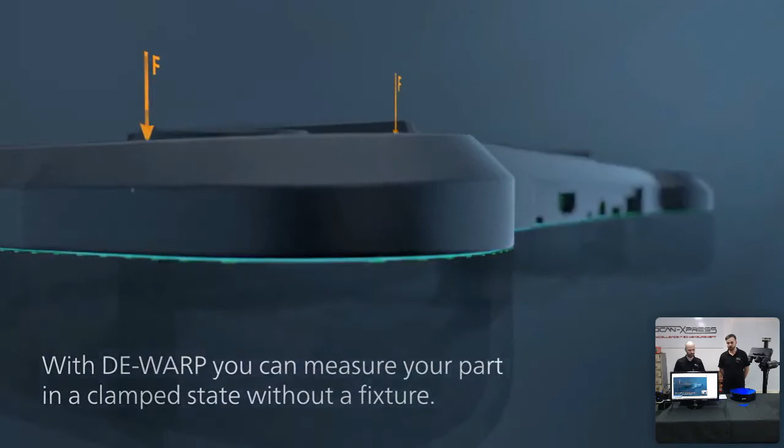Yeah, wonderful. So that's dewarp, showing dewarp in action. Brand new feature coming this year to GOM Inspect. So GOM actually developed these kind of tools and this kind of feature for sheet metal parts. It's called adaptive fixturing. It's called not adaptive fixturing.

It's called virtual clamping. Yeah, to automatically clamp those sheet metal parts back to this kind of virtual fixturing to simulate that effect. That was quite an in-depth process. It involved getting a different package and a different license involved in the software. The plastic injection molding part is actually available within GOM Inspect.

So it's a much simpler process, and we can do it on pretty much every injection molded part. What we do is we input some critical dimensions, such as the material properties, the CT, and things like that. And then it's going to do this calculation of adjusting that and actually applying those over-constrained forces to our captured scan data.

Really exciting feature, and I'm really excited to give it a go, and then have a chat with some of our customers who are already using these systems, and how these features can just be bolted on and really improve their manufacturing process and save time and eliminate the need for creating those really complex and expensive fixturing.

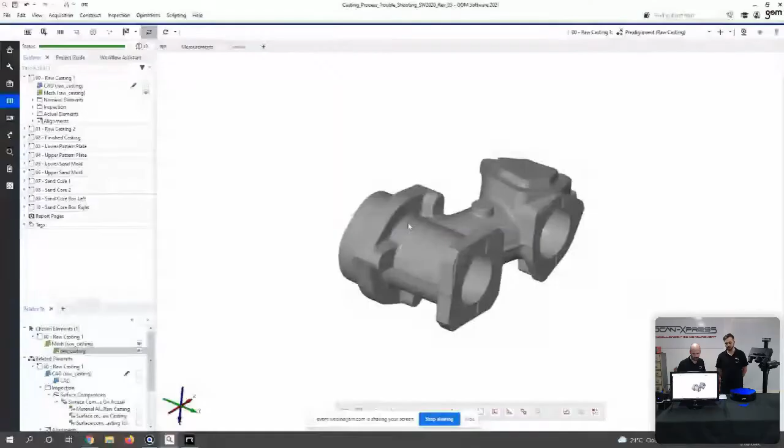Jose got a great question about the surface texture. Now, surface textures are a tough one. These scanners are very high resolution. We can capture a lot of information. If I just show you back in here, if we turn the screen sharing on, I'll dive back into that casted part. You can actually see a lot of those surface nuances on that casted part, and a lot of it's going to depend on the system that we use and the resolution of that system.

When it comes to the surface finish, maybe an RA or an RZ value defined on a drawing, these systems really aren't designed for doing that level of inspection. We've got other tools that we use for capturing those kinds of surface finishes. But what we can do with these systems is detect surface defects. So that might be a scratch in the surface, some damage, a dink or a nick, or some small scratches.

And we've got features within the software which will actually analyze those surfaces automatically, and we can apply different parameters to detect those defects automatically. Hopefully that answers that question. If it didn't, just please ask again in the chat.

Josh, we've got another question. Davis has asked, can you set up the software to do those GD&T checks on multiple sample parts without resetting everything up? Yes, you can. The software is really well suited to that. Once we've measured a part for the first time and we load the scan data into our software with the CAD model, we can set up all our inspection tasks, our diameter checks, our position checks, GD&T checks, everything that we want to measure.

And then we can save the project as a template. That means next time the part comes off the assembly line, or we've got another part as inbound goods and we want to measure that, all we do is measure it, drop it into our template, and the project will automatically update. So all of our checks will be automatically updated, and we've got that result and feedback straight away without having to recreate all the elements.

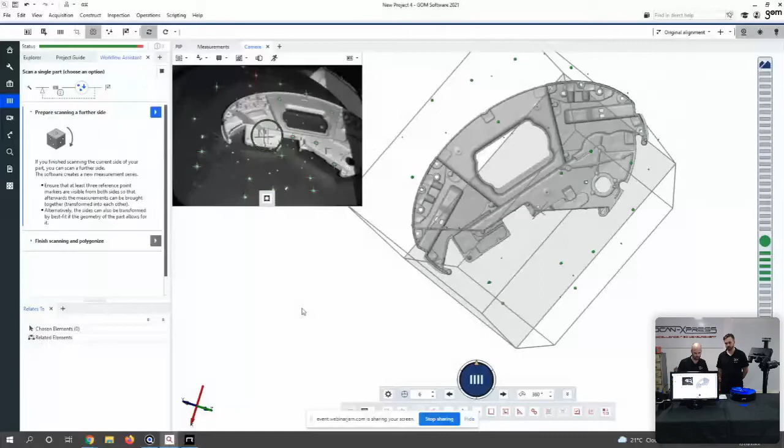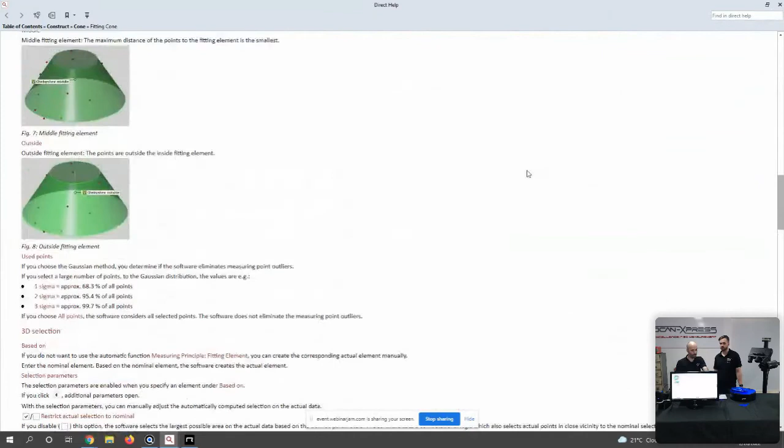So again, let me just share my screen, and I'll show you within that GOM software. Let me just open up this project right here. Now, what GOM have got within all of their tools is the inbuilt direct help. So let's just say this cone here. What I can do is hit this little question mark. That's going to take me to the direct help built within the software. It's going to talk me through exactly what is involved in constructing this fitting cone, all of the menu elements, anything that might affect that tool. It goes into a huge amount of detail in exactly what's going on in creating that feature. And that goes for any feature within the software. So this will answer a lot of the questions.

But the other thing is that GOM have got their own online training portal. So, GOM training, and what you can do from there is full-on training courses. These are a couple of hour courses or maybe even 2 or 3 day courses. You can sign up to them online, follow the video tutorials online. There's interactive workflows, and you can actually do it alongside the instructor, as well as a quiz at the end to pass your training process. And that goes for loads of different features: simple operation of the scanner to full-on GD&T training, scripting training to learn Python, all sorts of things, all available through that GOM website.

Some of them are paid for, but there's a lot of free ones on there as well that you can access. I'd love to show you it, but it would just show you all of the courses that I've currently started and haven't completed. So it would just embarrass me, so I'm not going to do that. It's brilliant, yeah. But if you need more information about the training that's available through GOM, just talk to us directly. We can talk you through that.

The other option is, of course, we offer on-site, in-person training along with these systems, and more than happy to do that as well.

Yeah. And international too. We can go to New Zealand if they're letting us in at the moment. Yeah. Not sure about that. Absolutely. Or international to WA. To WA, yeah. So it would be great, wouldn't it? It would be great to get over there. Yeah. We go to Queensland, but we need to wear swim trunks. Yeah. So, yeah. These scanners do not work underwater, so sorry, Queensland, you're fresh out of luck.